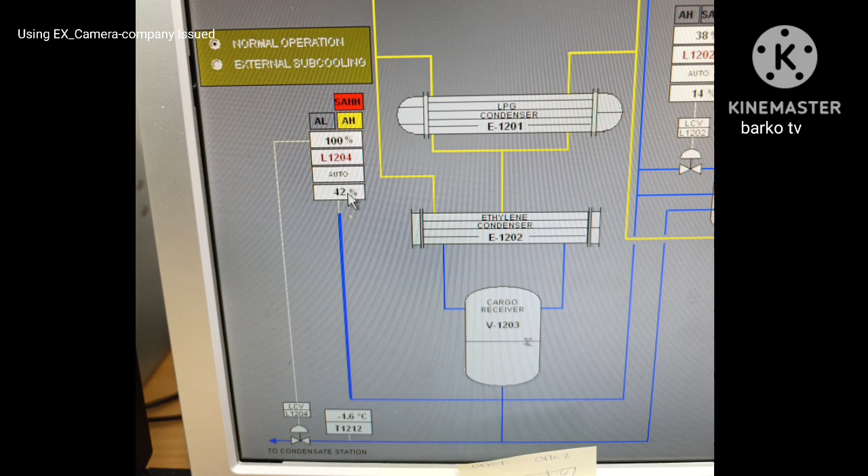We have a problem today. During loading, our cargo compressor cannot start due to the high alarm triggered on our cargo receiver. Alarm high and high. They said that the expansion valve is not responding because it's always 100%. It means totally open, which is true, 100%. But we need to check if the expansion valve is the problem or the transmitter for the level of the receiver.

Okay, the set point is 21, which means the cargo receiver must be maintaining 21%, controlled by our expansion valve. The output is 100. It means the expansion valve is totally open. 42 is the actual level of the transmitter. We need to check if that is true because we don't have any reference or local level on our receiver. It's only digital.

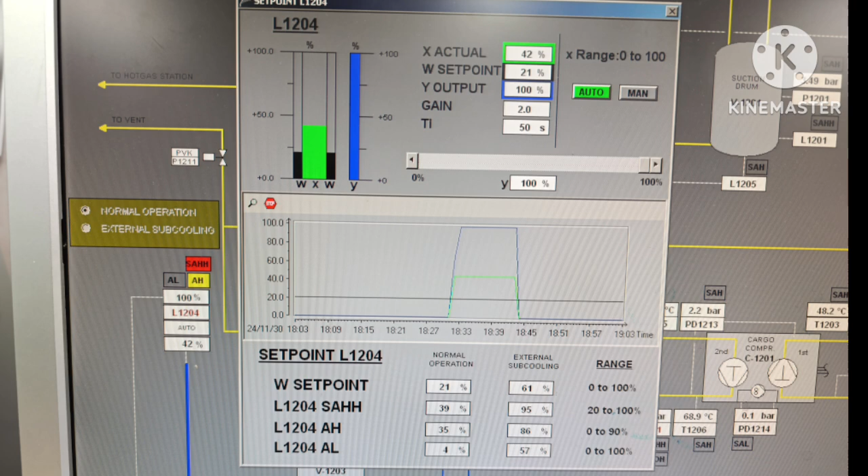We need to simulate, and I'll teach you a fast and easy way. We go to the cargo receiver. This is the digital display, the only display on our receiver. 42.5% is the level, equivalent to 1296 mm. The high level is 800 mm, equal to 35%. High high is 39%. It means it triggered the alarm.

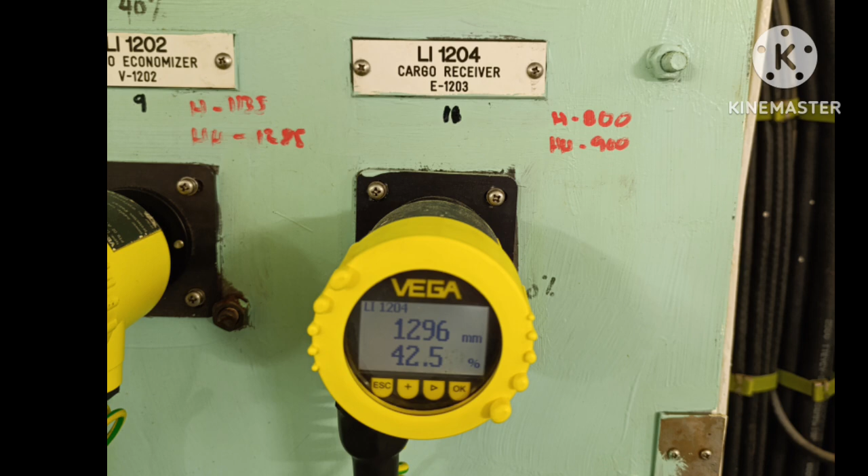We need to evaluate if the level transmitter is the problem or the expansion valve itself. This is the best solution: we need to use a simulator. This is our simulator, 20 milliamps. Simulating 20 milliamps means maximum level, equivalent to 100% of level. We need to remove the two wires of the transmitter so that the simulator acts as the level transmitter. On the display side there are 4 wires; never mind those, only these 2 wires.

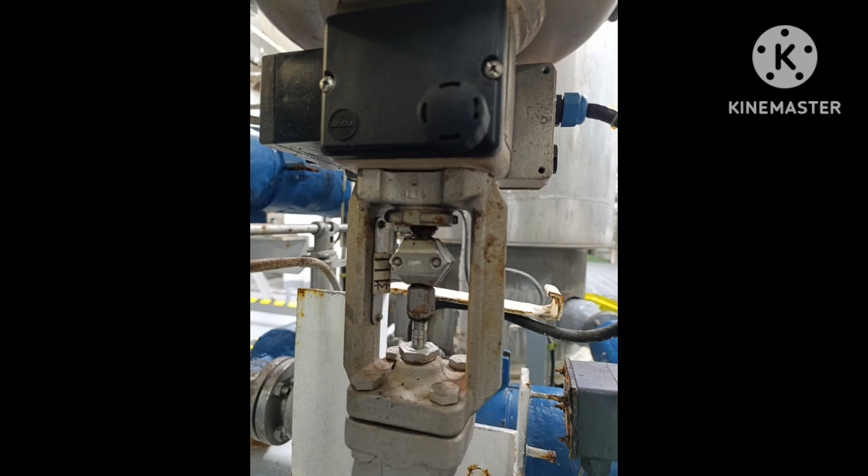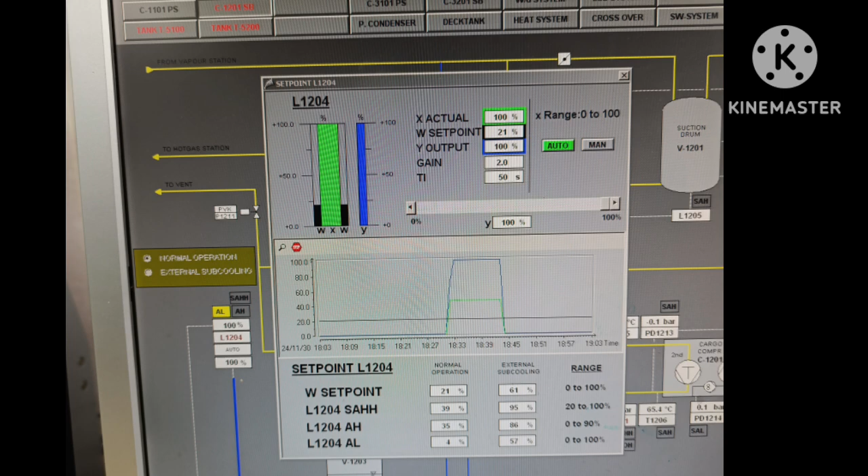Check the expansion valve, it must be 100%. 100% is totally open. Our expansion valve reacts at 100%. Then we go to the HMI to check. The actual is 100, that is the level. And the output is 100, that is the opening of the actuator or expansion valve.

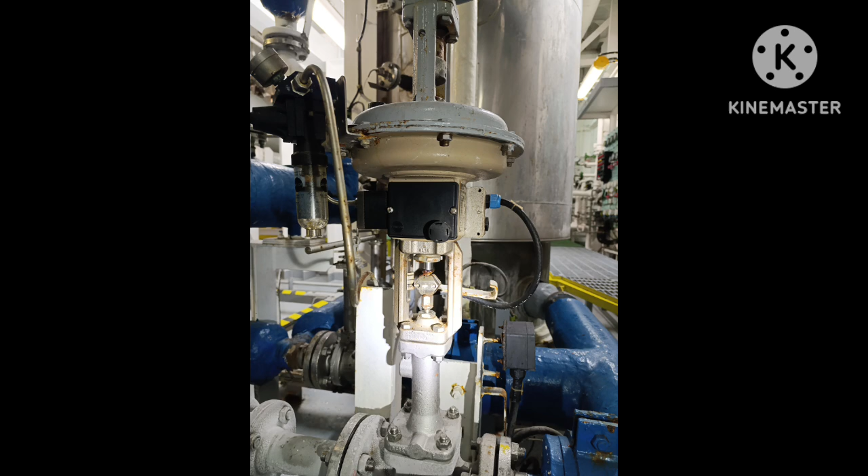Next, to confirm, 4 milliamps. That is the minimum, 0%. We simulate level 0%, 4 milliamps. The expansion valve will totally close. As you can see, totally closed, and it is responding. It means the expansion valve has no problem. Okay, go to the HMI. Output is 0, same as the reaction of the expansion valve. Actual 4 milliamps equals 0, which means good.

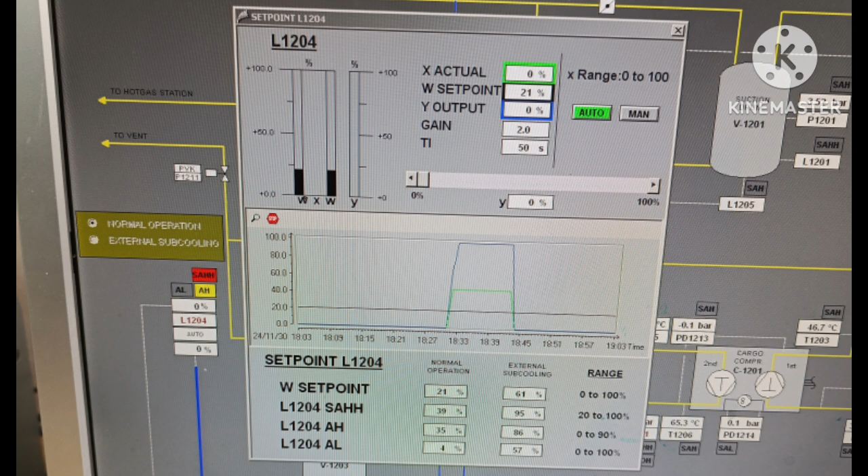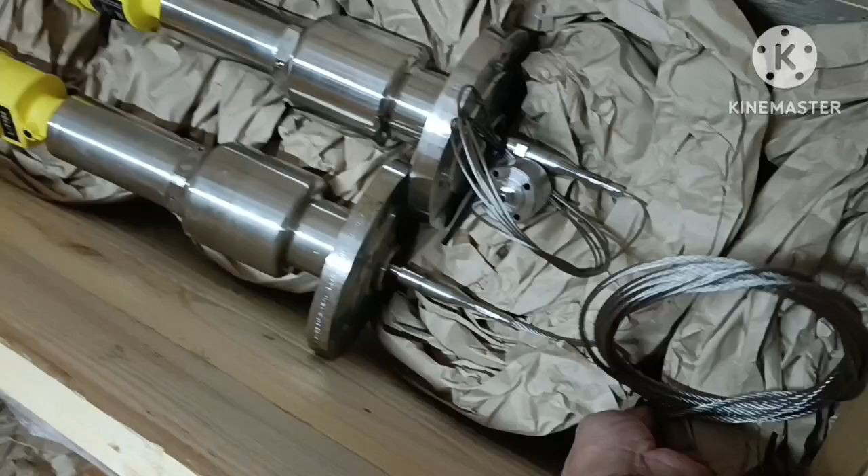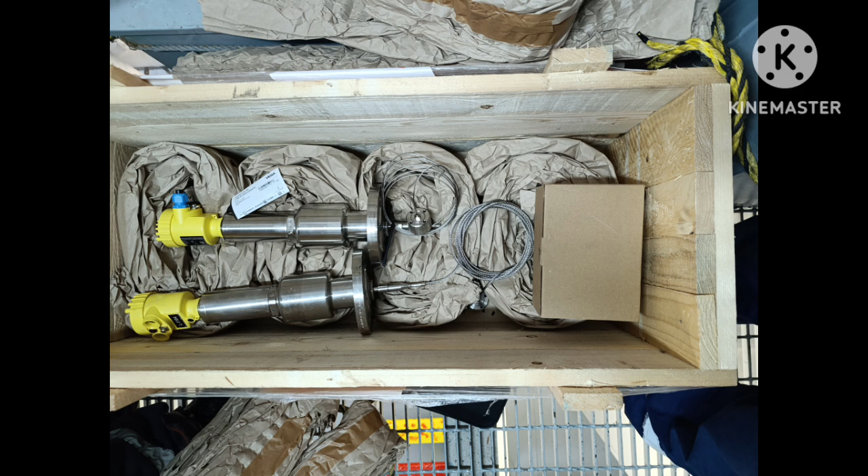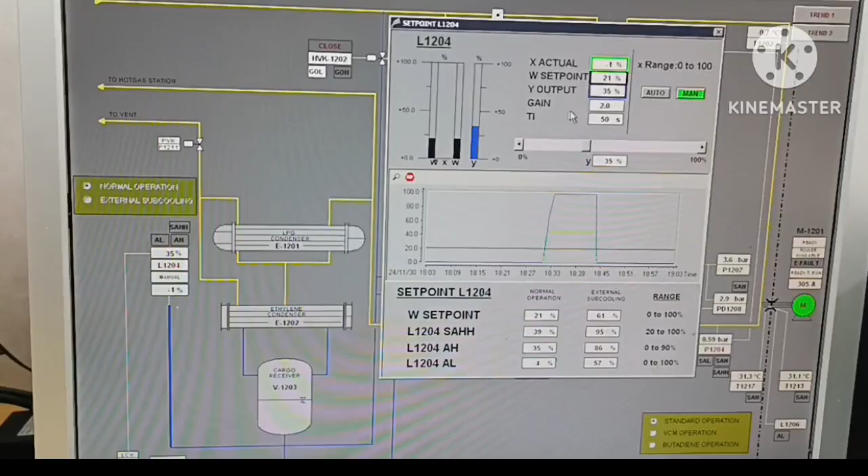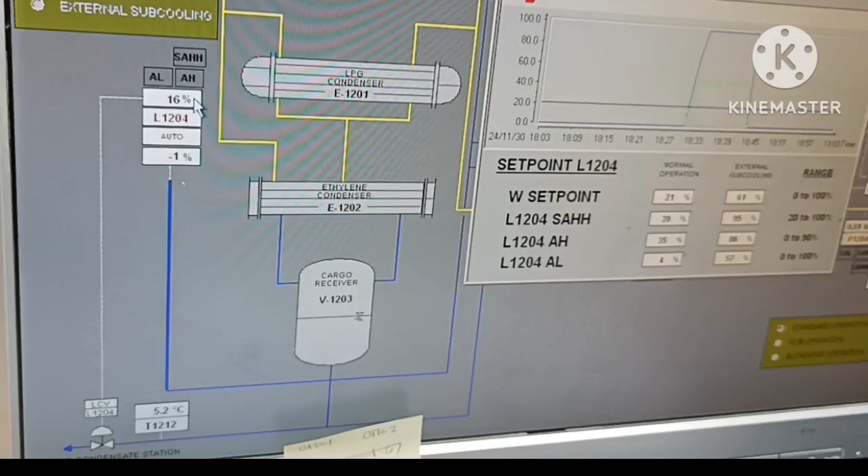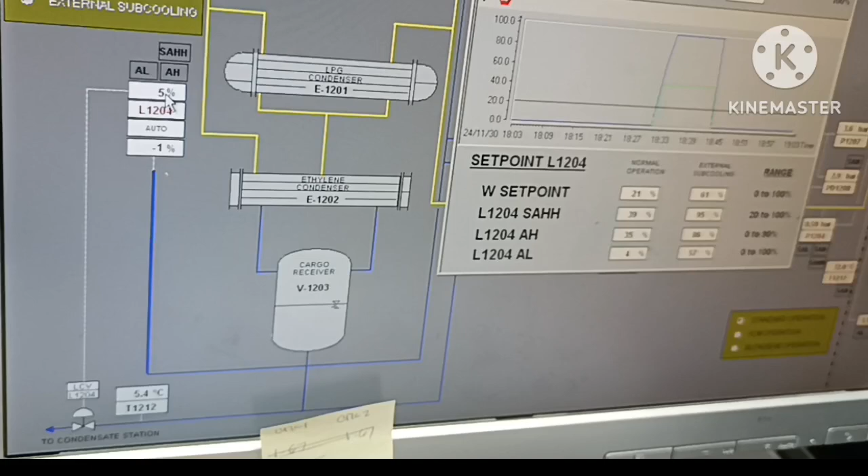We run auto first because we observed for 20 minutes, and the actual, that is the actual level of the transmitter, is different again. Actual level shows it's empty, but the truth is there is liquid in that receiver because the pipe below has ice.

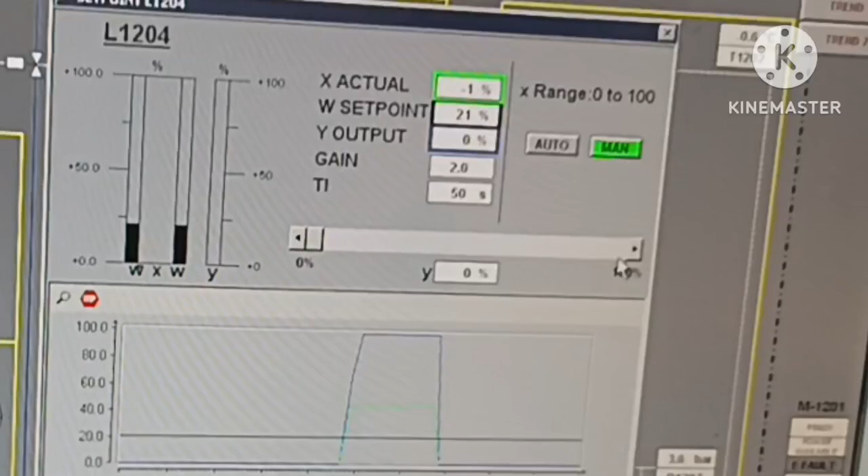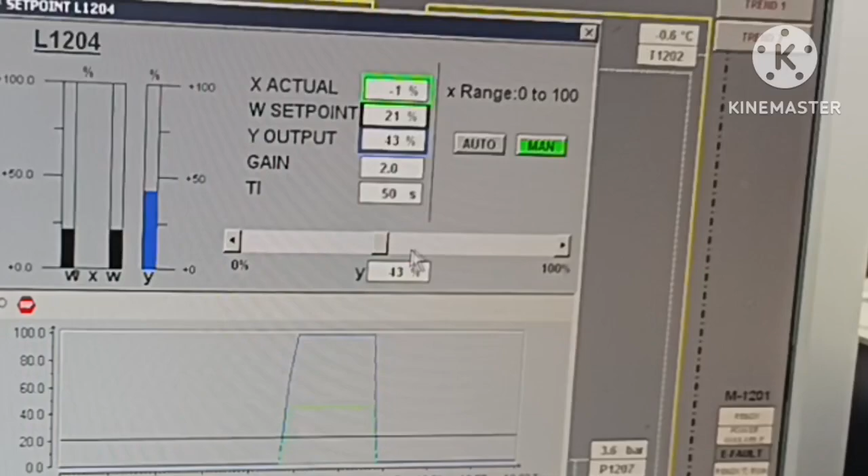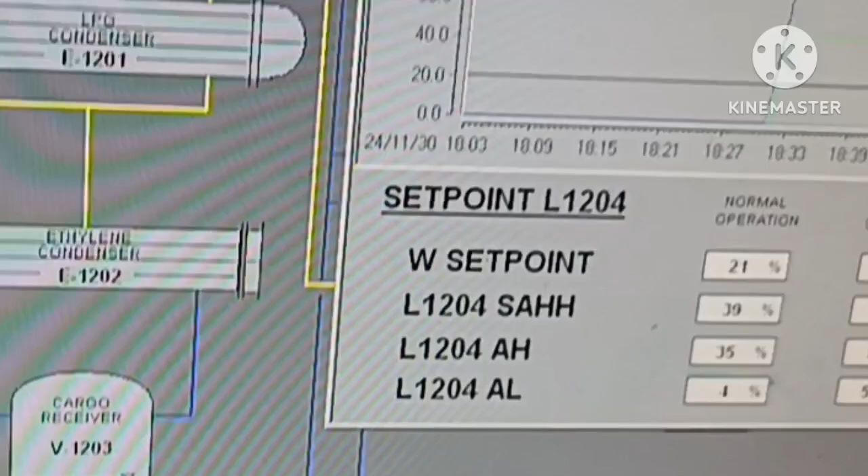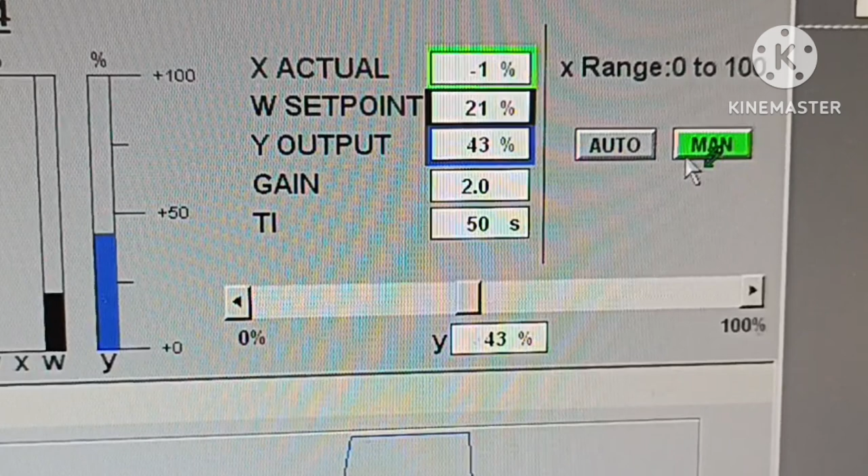Okay, now we do manual and adjust the output to 43, so that we control the expansion valve manually until it's stable, or set it lower, and that's it.